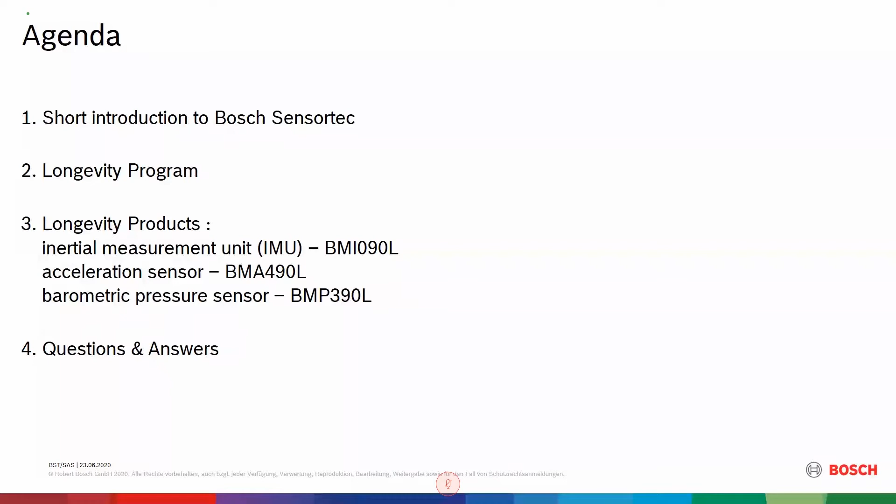Let's take a look at Bosch Sensortec. As Markus already mentioned, Bosch is a big player when it comes to the MEMS business in total. The Bosch Group is by far the biggest MEMS supplier globally. Bosch Sensortec was founded in the year 2005.

The history with Bosch and MEMS started already in 1995, mainly due to automotive sensors in the past. Bosch Sensortec was founded in 2005 because someone saw the need of using an acceleration sensor to determine if the screen of a mobile phone is in landscape or portrait mode, so it has this tilt function. And that's how it all started.

So Bosch Sensortec has so far purely focused on the consumer market, and now we're paying more and more attention to the industrial market, especially in EMEA. And especially for this reason, we have introduced the longevity program, which is part of the presentation today.

As said, there's a huge history and knowledge base when it comes to designing and producing MEMS. If you look at the total numbers, there's far more than 10 billion MEMS sensors that have been produced, branded Bosch. Looking at Sensortec in just the year 2019, we shipped about 1.3 billion units to the market. So we have a proven track record that we can ship very high quality and very high volumes to the market out there.

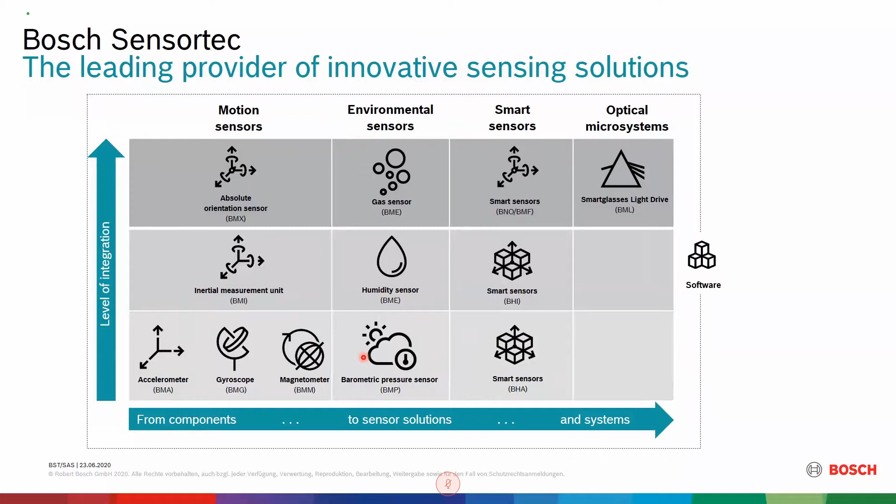It's time for the first video, and I would like to introduce Sean to you. Sean is one of our very famous Bosch colleagues. If we start the video, you will be able to adjust the volume in the window of your media player. In this video, we will not do any talks, but in later videos we will also have some live comments, so feel free to adjust the volume yourself when convenient.

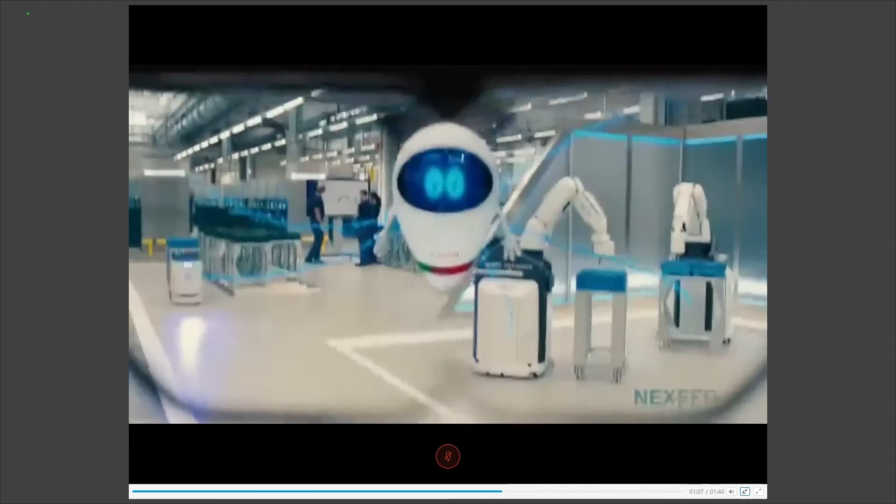Let's produce like a boss, easy use like a boss, connect machines like a boss, perfect team like a boss, flexible line like a boss, make it mine like a boss, no downtime like a boss, that's worth the rhyme. Excuse me, did you say no downtime? That's not true, we have scheduled downtime. Like a boss, control detect like a boss, phone check like a boss, go 5G like a boss, IoT. So efficient, that's a mission. Never stressed like a boss. AR test like a boss. Data cloud like a boss. Makes me proud. Together we save energy like a boss. IoT. Manufactured like a Bosch, with many innovations for the factory of the future. From Bosch.

So you all met Sean now. This video is showing quite some nice applications which we are targeting with these products, namely robotics, autonomous kind of vehicles, and anything that has to do with motion sensing or motion detecting.

Let's talk about the longevity program in detail, and what is behind this. Bottom line, very short: when we talk about longevity, we take our most high-performing parts of one of the product areas that we have and make them available for 10 years after start of production.

As you know, Bosch Sensortec has a very strong history when it comes to the consumer market. In order to address the industrial market more aggressively, we've decided to launch this longevity initiative to give customers the ability and the long sight to have these products available for a long period of time. We all know that in the industrial market, it can take several years for a design, plus a few months of qualification, or even years per qualification.

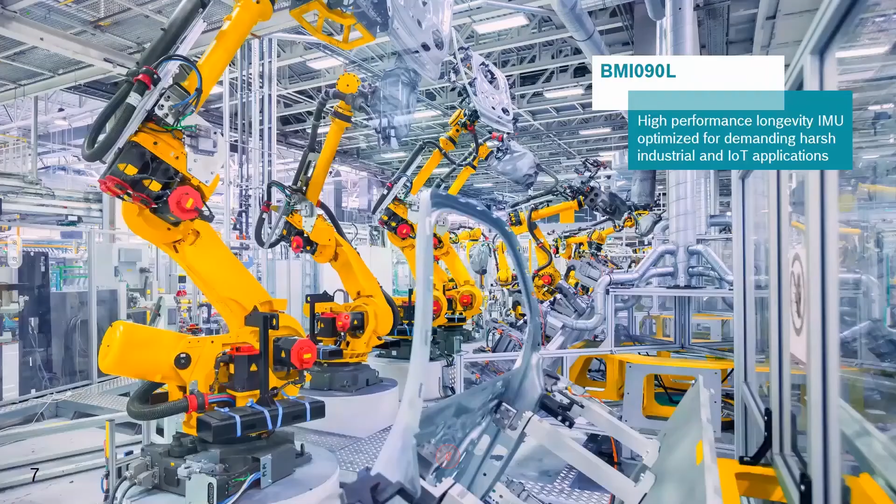It's time to take a look at the first product, an IMU, and I will hand the word over to Florian to walk you through this part of the presentation.

Thank you. So the first product from the 3 we'll be presenting today is an IMU, and the part number you can see on your screen is the BMI090L. Maybe just on this slide, you can see from the part number that there is this capital L at the end, and you will see this letter at the end of the different products, and this is what we will use to easily differentiate the longevity part numbers from the other part numbers in our portfolio. This is the first part number, and as Mark introduced a bit earlier, an IMU is a combination of an accelerometer and a gyroscope in one package.

Targeting the longevity program, this IMU is part of our high-end, high-performance IMUs. It is meant to answer the demands of harsh industrial or harsh environments in general. In particular, there is a very unique feature, which is vibration robustness, especially in the accelerometer signal, that is achieved by a unique design specific to this accelerometer in the market.

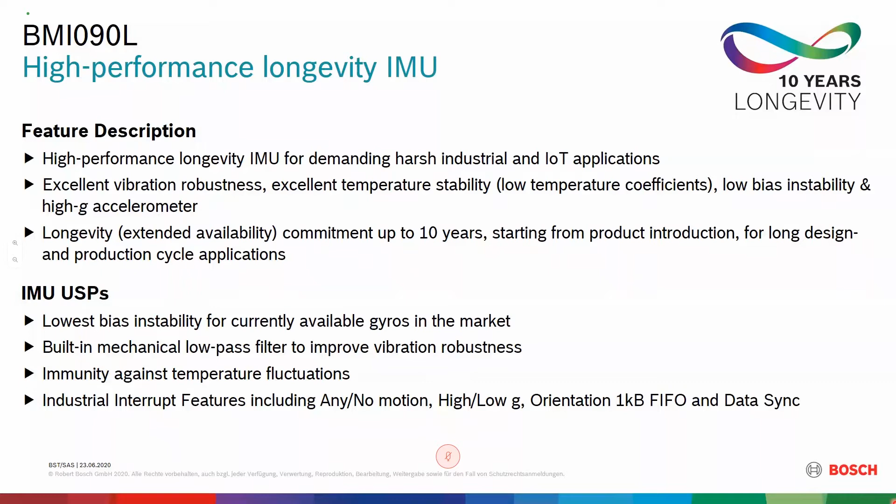I will not spend a very long time on this slide, but we would like to announce that these parts that we will present today, including this one, are already on our official website now. So you can, starting today, already look for this part number on our website. You can find the technical data and specification. You can find the data sheet. So this product is already available and documented on our website, including the stability or TCO specifications we mentioned; you can already find the major specifications there.

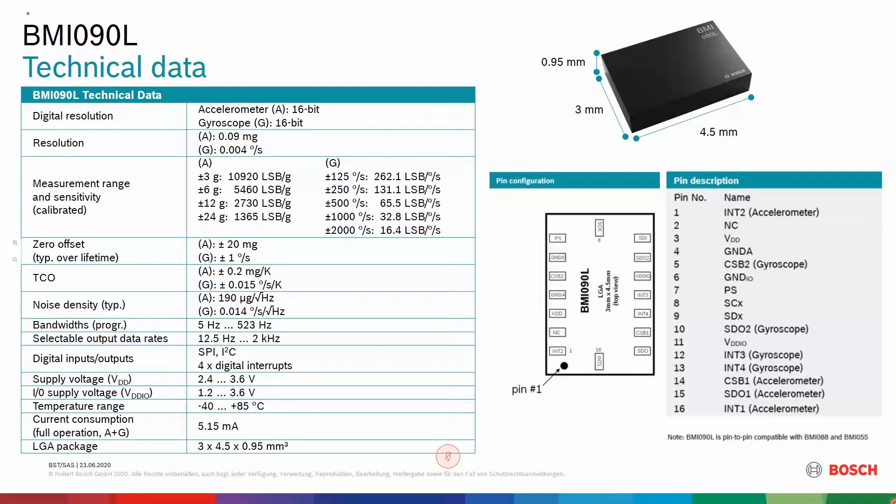Also good to know, and that's why we see that there are some footprints and package dimensions mentioned in our slides today, one of our goals for the longevity program is to also address pin-to-pin compatibility with other parts of our portfolio. So basically, we will always offer the longevity part as a pin-to-pin compatible variant of existing product lines. In this case, the BMI090L is pin-to-pin compatible with its predecessors of the high-performance IMUs we have.

So just to name a few, but this is a non-exhaustive list, as is always the case for our sensors. It's impossible to bring a fully exhaustive list, but anything from industrial IoT, industrial robots, or drones, which has been quite popular, though there's a different need and performance requirement in a toy drone versus an industrial or agricultural drone, and also in white goods and appliances in general. Typical use cases in this market could be navigation and control, motion detection, motion or position tracking, or asset tracking in the large sense.

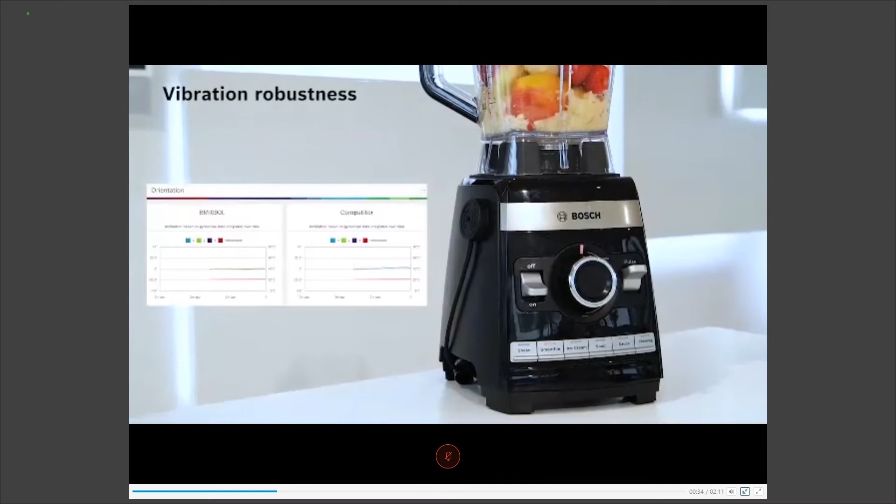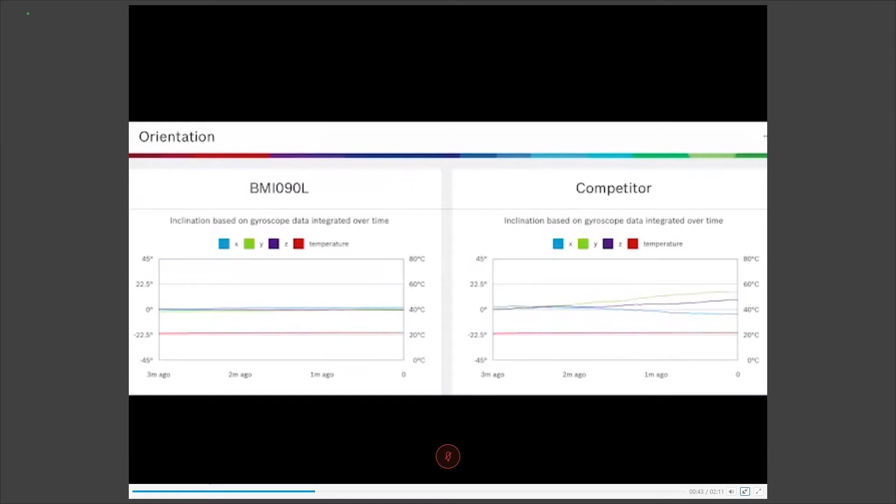As mentioned by Mark, our ideal goal would be to show you these demos in person, and we thought a nice idea to show the temperature stability and vibration stability of our part would be to show you the data from our IMU in this scenario. We see over time plots showing both gyroscope and accelerometer performance against vibration and temperature while the mixer is running, and by estimating the orientation of the mixer over time, we see that our IMU is showing very good stability even against a competitor part on the same PCB.

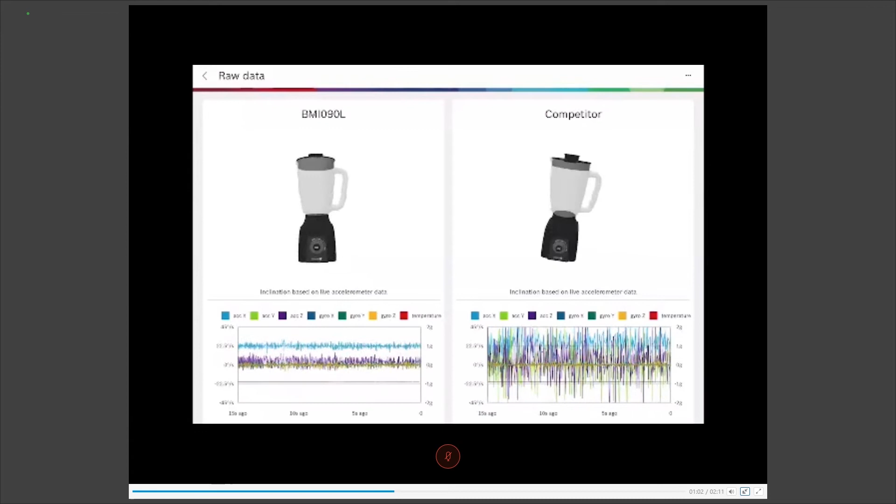We will see in a few seconds the accelerometer signal with our BMI090L on the left side. We see from the raw signal at the bottom and from the estimated orientation at the top that stability is significantly better than a similar configuration for a competitor part in the market.

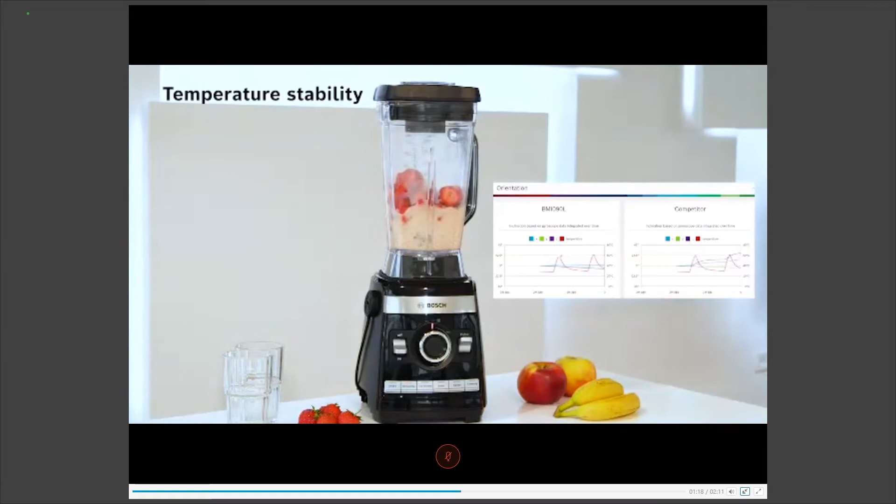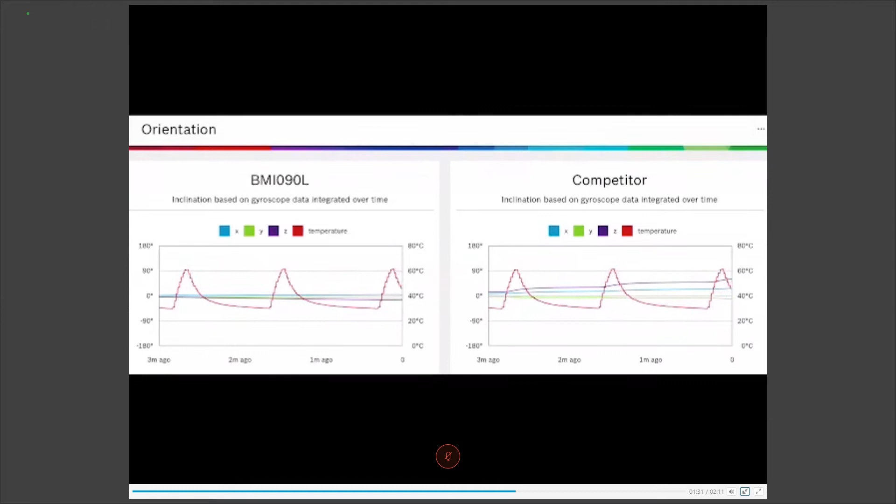In the plot you see now, the red line going up and down is actually temperature fluctuation. And here again, we see that—let me take a small pause here in the video—while the red line is increasing and decreasing, which is the temperature, our sensor on the left side is showing very stable outputs, while the competitor part is drifting more quickly. This is due to the temperature change creating offsets or behavior changes in the signal. This is seen here in the gyroscope, and in a few seconds you will see the same behavior on the accelerometer, where the temperature change creates a tilt offset in the competitor part.

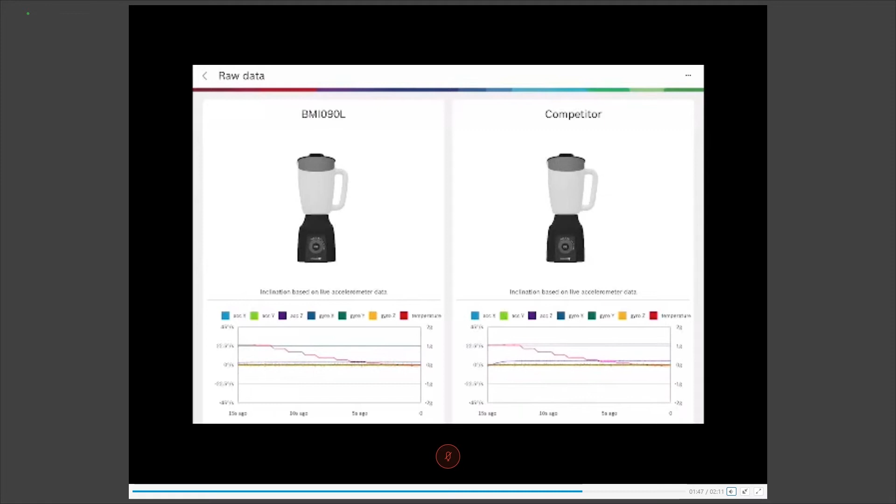If that was a live event and we could meet in person, you could probably benefit from one of these nice smoothies as well. So we hope that we will be able to meet you very soon in the near future.

Moving on to the BMA490L, this is the longevity accelerometer part number we want to introduce today. Again, we target high performance. This accelerometer also has very good stability over time and over temperature changes. It does not have a gyroscope, it's not an IMU package, it's only an accelerometer. It also doesn't have this vibration robustness because we target different scenarios for this part number. But of course, it also has extended availability, dedicated interrupt features, and very good performance.

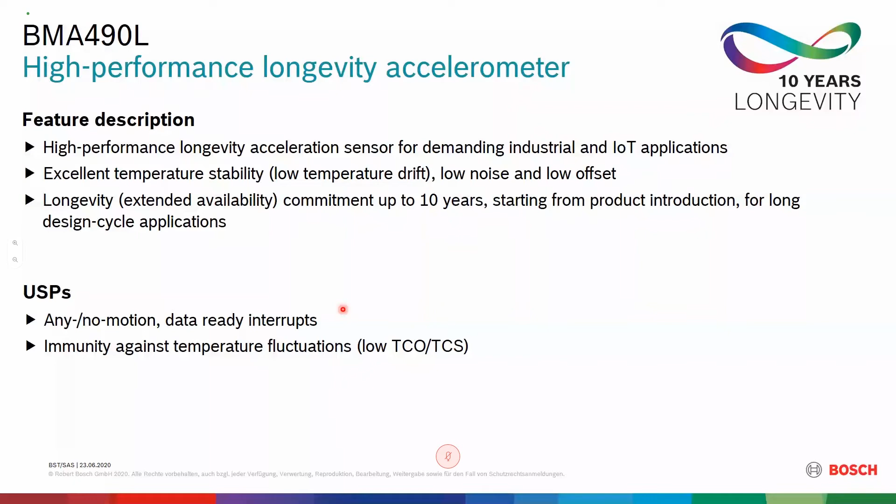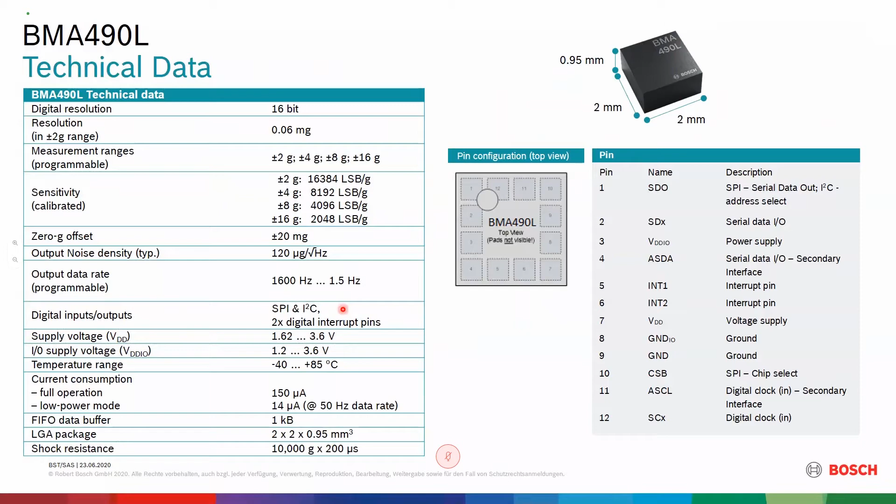This is the best performing accelerometer in our portfolio today. Again, I won't dig into every spec here, but for this part number as well, the product page is available on our website, so you can find the technical data in the product flyer or on our website. This accelerometer is pin-to-pin compatible with existing accelerometers in our current portfolio, so hardware can be reused, drivers need to be updated, but hardware-wise we try to keep pin-to-pin and footprint compatibility between generations and product lines where possible.

Markets are similar again. We see even more use for standalone accelerometers than gyroscopes, especially for motion or no-motion detection or basic shock detection. Sometimes you don't need the gyroscope as much, since that's more used for dynamic use cases or real-time orientation monitoring. If you're focusing more on simple motion or shock detection to trigger events, warnings, actuators in your systems, or wireless messages, then an accelerometer is very popular. Otherwise, the markets and targets are almost infinite here.

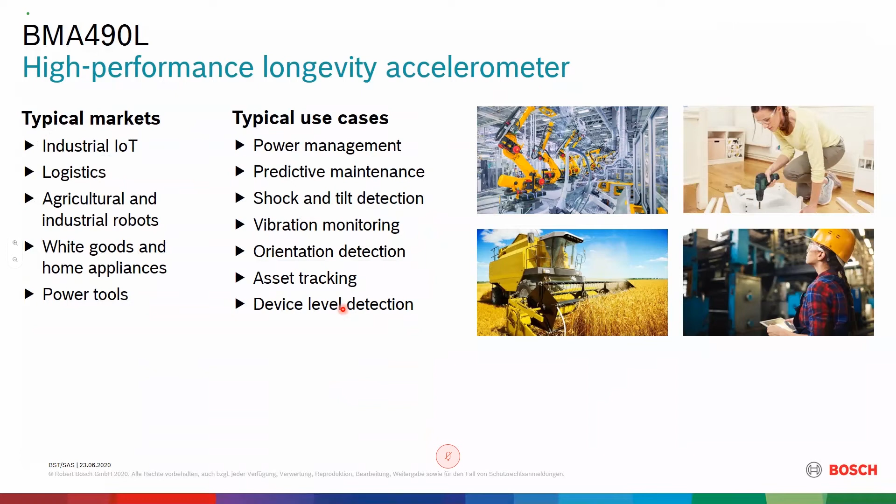Finally, the last product of the longevity we are releasing right now is a barometric pressure sensor. Barometric pressure sensor means that we are measuring the atmospheric pressure. This is not gonna help you measure several bars, so this is really to measure the atmospheric pressure. And in the demo videos later on, you will also see some maybe unexpected usage for this.

So I think the message now hopefully is clear, but this is an evolution of the previous generation available already, with even further improved performance against anything we had before. So this is the best performing barometric pressure sensor we ever had and we have in our portfolio right now, from temperature stability, short-term, long-term stability, noise. We have really significantly improved the performance of this product versus the BMP388, which is the non-longevity barometric pressure sensor available today.

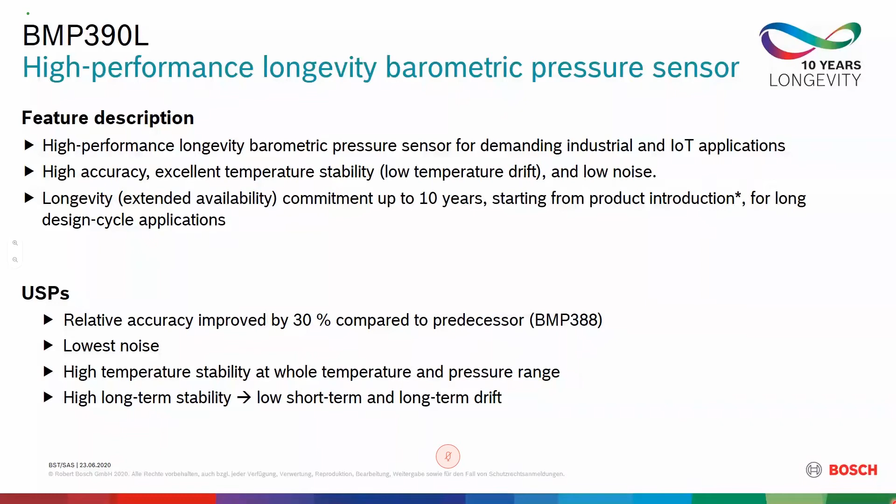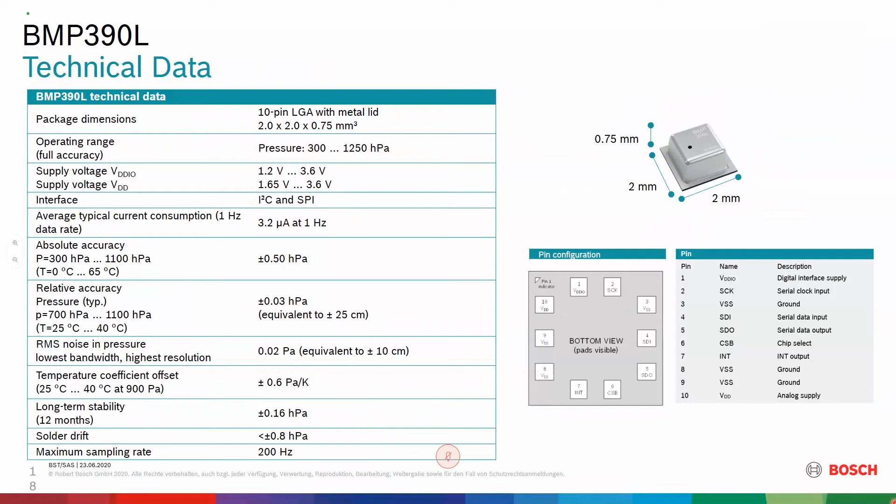Still, and this is again the case, pin-to-pin compatibility between our current generation BMP388 and this new longevity variant. Of course, performance is significantly improved. In that case, even software-wise, there is almost full compatibility. There are very, very few differences, like some chip ID, but otherwise the learning curve, if you have any experience with our existing generation, it should be a very, very smooth transition to the longevity part number for this pressure sensor. So we are very excited about the performance, the part of the longevity program, and the compatibility with the previous generations here.

Target markets are similar. This is common for all the longevity parts. Here we see some different use cases or applications that are enabled for barometric pressure sensors. Of course, we are not directly sensing motion anymore, and maybe you are more familiar with barometric pressure sensors being used in some weather forecasts or weather monitoring, but there are in fact many, many more use cases for barometric pressure sensors that you may not be aware of or familiar with.

And we will have in a few slides a video about water level detection using barometric pressure sensing, but barometric pressure is also used in many wearable devices, for example, to improve navigation and altitude estimation. This also helps with better tracking, so this is also true for asset tracking. But there are also even applications up to airflow or clogging detection that are possible with some clever design and a barometric pressure sensor, unlike differential or different technologies.

So, first demo video here for the barometric pressure sensor.

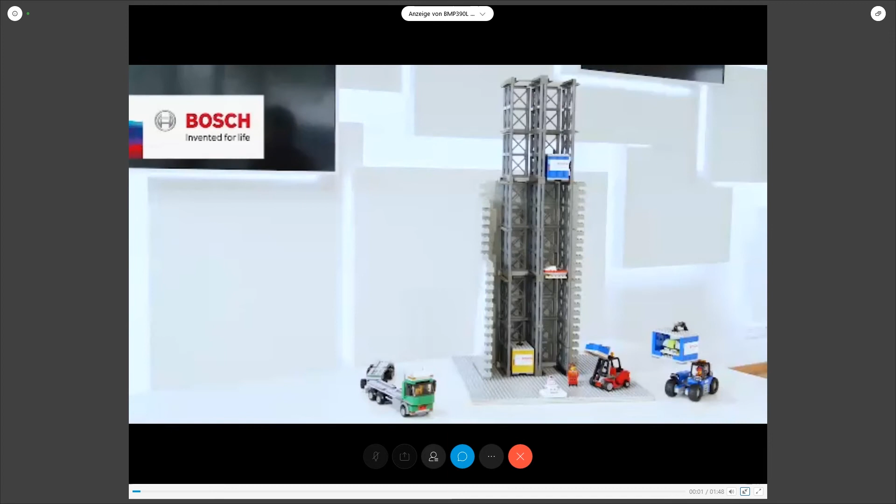So here's our Lego warehouse, and we will show you the performance of our pressure sensor. And here is Sean again and his lovely girlfriend. Sean has the wonderful idea to surprise her, and we will use this unique chance to see what may happen in a warehouse and tracking the goods, and how the resolution of our pressure sensor can be beneficial in determining the level of a pallet in the warehouse, for example.

So Sean decides for one of these two things. It's going to be the dress. And now let's move on to the warehouse and see what happens there.

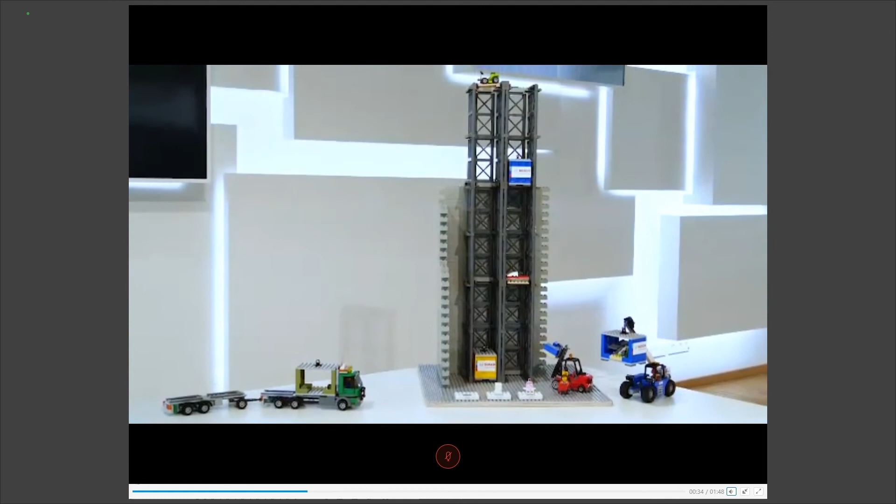Here's the warehouse again, the levels are about 25 centimeters on top of each other. And as mentioned, the high resolution of our pressure sensor enables the tracking of the goods. Every pallet is equipped with one of our BMP390L pressure sensors, and this will now help us to determine the level in the warehouse. You can see now level 1 is ground floor. The pallet is moved to level 3. The sensor sees that right away and stores the data.

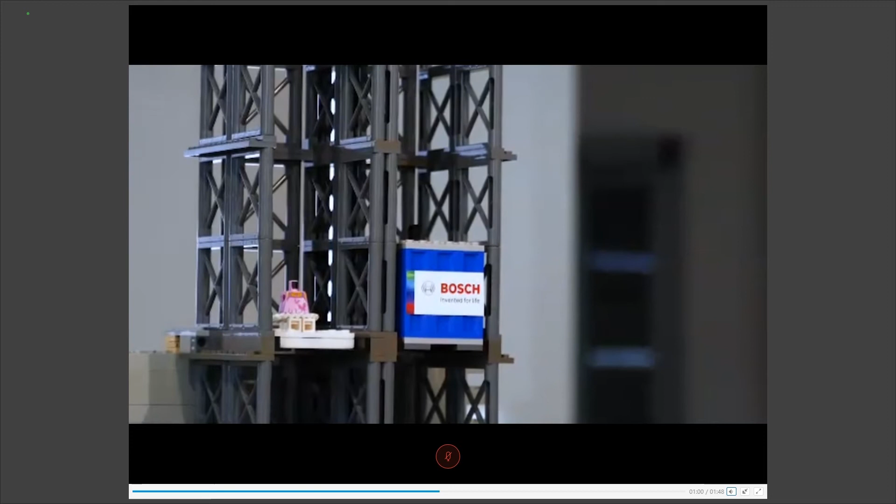Now the pick and place team can find this dress after Sean has placed the order. Goods can be located and removed to the truck for transport. Here, actually another application may start. Now you can have the pressure sensor data available, plus you could, for example, add an accelerometer to determine which forces the goods have been subjected to.

So in terms of asset tracking and quality monitoring. In the meantime, Sean gets his confirmation, and we should see the parts be shipped and delivered. And here's our happy end.

Okay, as Florian mentioned, we have another video following right away, showing an example to measure the water level, for example, in a washing machine using a barometric pressure sensor. And I will also now give the word back to Florian to walk you through the last video of the day.

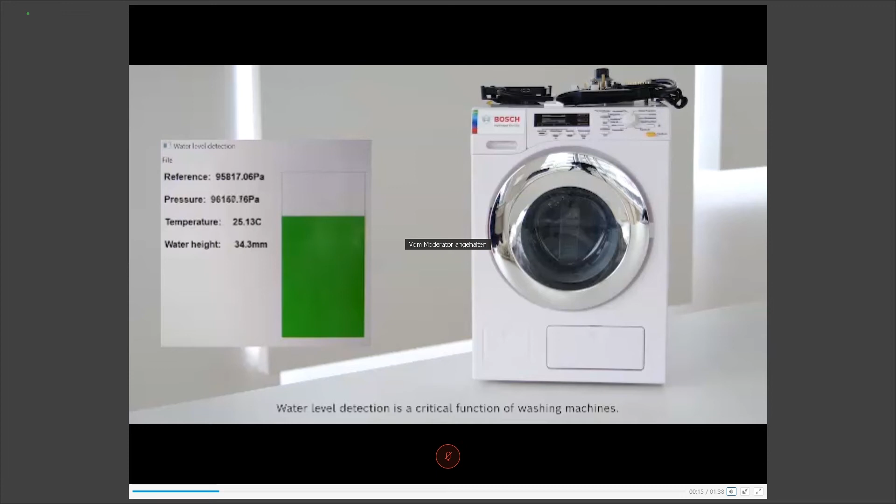So this is probably one of the least expected use cases if we introduce barometric pressure sensors today. I hope you can read most of the text, but I will try to pause and walk you through the use case. On the right, we have a miniaturized washing machine with an actual water tank and drum, and you can see there is water in there at the moment. The goal will be to replace the existing, not so precise and challenging water level detection system and show that this barometric pressure sensor performs well enough to do these tasks, probably even better and more precisely.

In the current picture, we can see how this is achieved. So how can we estimate the water level from a barometric pressure sensor?

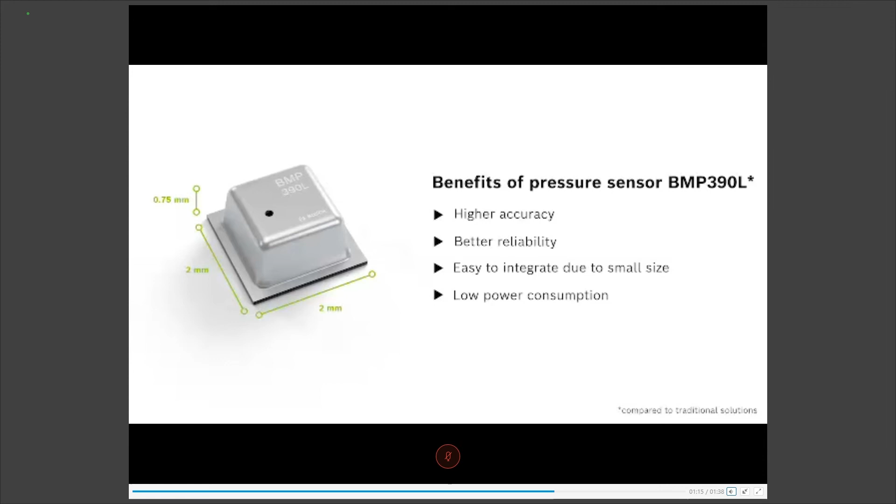So applications like this based on barometric pressure are possible thanks to the performance of our pressure sensors, and especially the very high performance of our latest BMP390L.

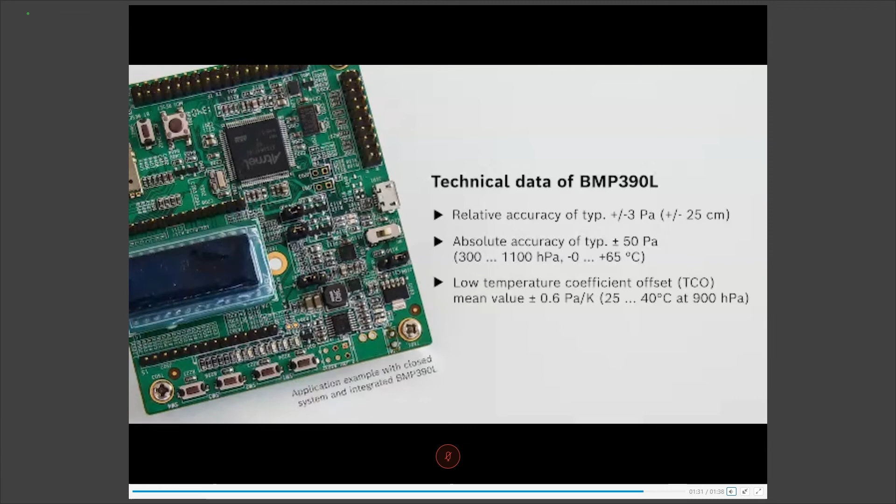You can probably guess the real benefits for the application: being able to monitor and track precisely the water, in this particular case in a washing machine. You can imagine that you will not waste water, which is both better for the environment by saving water, and better for the consumer as he will pay lower bills. You can imagine further applications where only the required water levels are used, so there's no wasted energy from running too long, etc. These are really advanced and real end-user benefits thanks to these sensors.